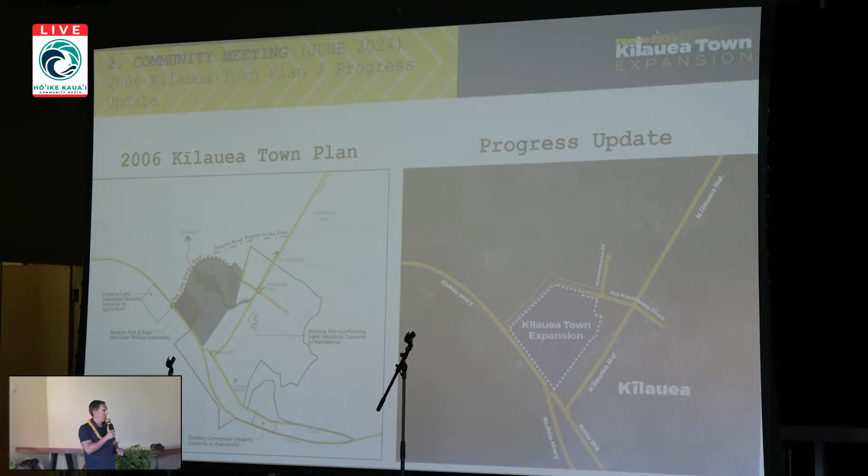So in 2006, there was a Kilauea Town Plan. I think this is where Adam was alluding to the comment, is this ever going to really happen? Well, yes, it is going to happen. Last year, the county secured the parcel which is dedicated to this expansion project, and it is moving forward, particularly hinging on that Namahana Parkway design and construction. Next slide.

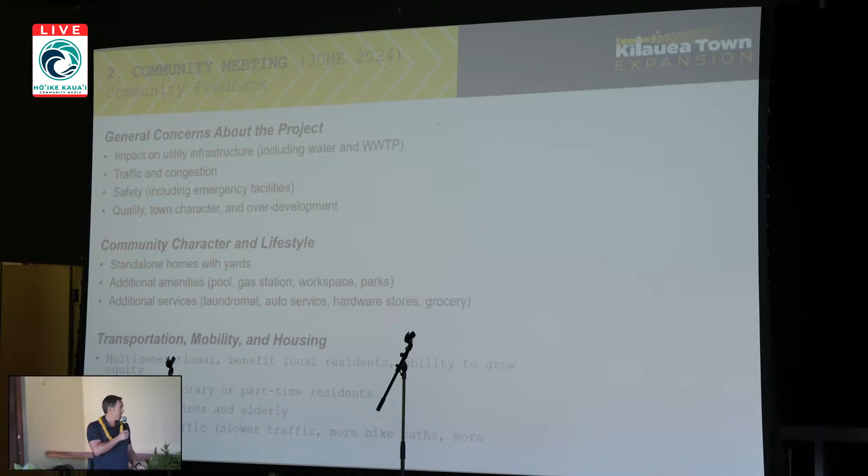So during the meetings, we always want to get some sort of feedback. Meeting number 1 was getting a lot of feedback—what you guys wanted, what your vision was—so we could start developing concept plans for this. Some of the notes that came out of those comments are as follows: general concerns, obviously infrastructure, water, wastewater, traffic, safety, and the character of the community. You guys don't want the community to be altered, so whatever's built has to somewhat fit with what's existing. And the last one, transportation and mobility—multi-generational, how to get around without driving. Can you walk? Can you bike? Improve traffic, slow driving down to allow for better pedestrian and multi-use access. Next slide.

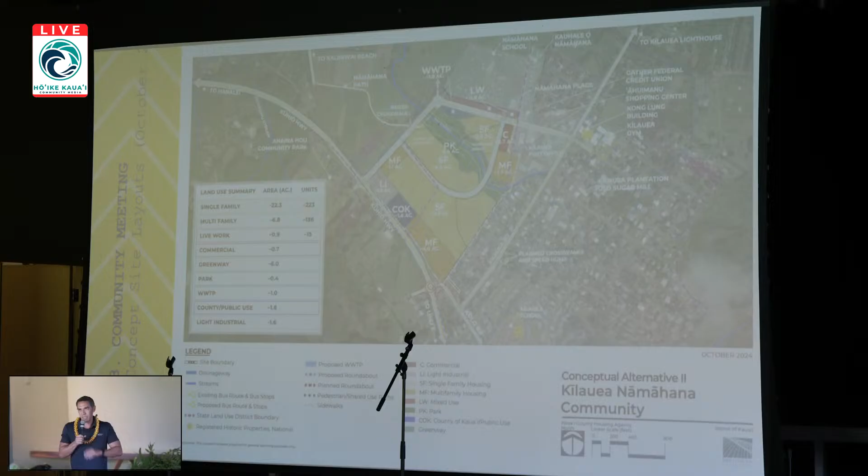There was a lot of feedback on these plans. Particularly, no one really liked commercial or light industry along the highway. They wanted it more focused towards the central core. That was worked out. The treatment plant—again, the concern was proximity to the school, proximity to residents of the multifamily, and wind direction. So that was worked out.

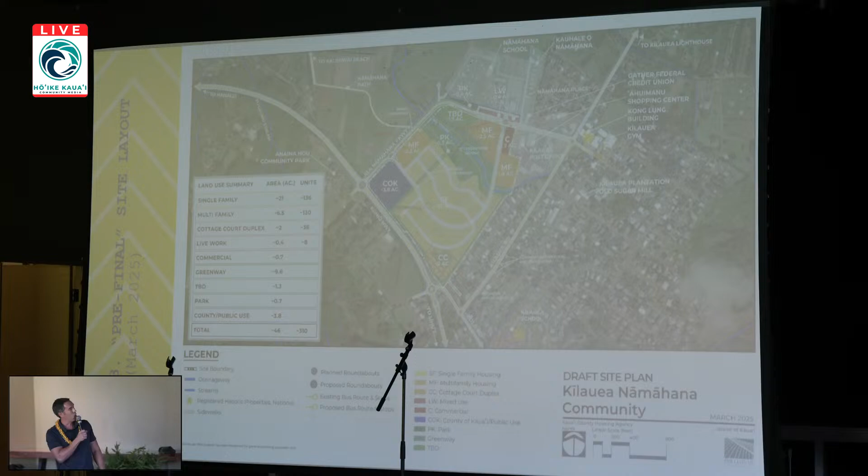The wastewater treatment plant is no longer at the top by the school. In fact, there's a green space labeled TBD, to be determined—that site is still to be determined. The commercial area is centralized to match the rest of the commercial area within town. The County of Kaua'i has that corner parcel along the highway near the roundabout, so there are plans for that which will be presented. Last meeting, in March, the county was saying it could potentially be the site of the wastewater treatment plant, and if space allowed, a potential fire station. We'll present on that a little bit later.

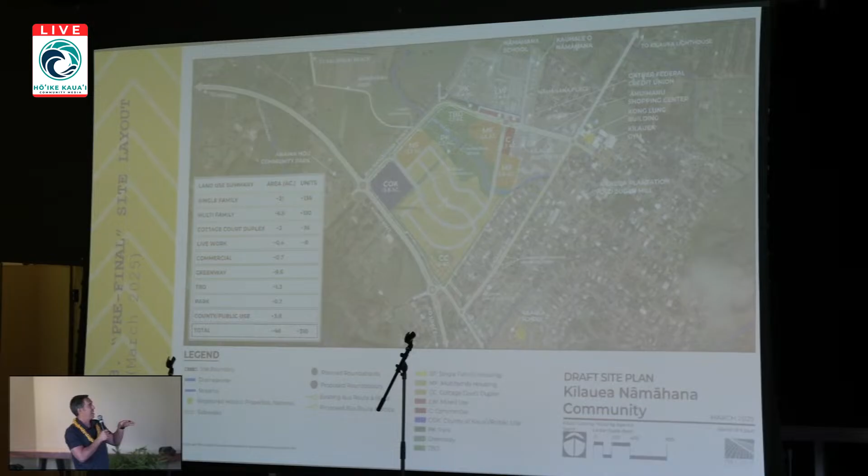So this was from March, and again not too much has changed. We just want to bring us up to speed a little bit as to what was discussed to get feedback from you guys and what it came out to be.

There was a need, a demand for bus stops. So these were bus stops we are hoping to integrate. We'll show those exact spots, which are still options—they're being discussed with DOT and the county to see how it will all work out. But bus stops were something that were included, and it's more fixed on our current plan.

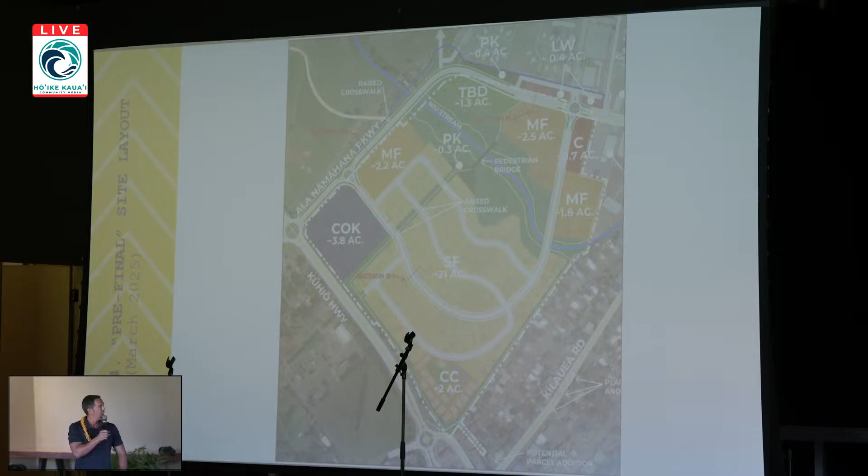So we looked at some roadway sections for comments and feedback to see what the community thought. N1 is that one along Ala Nāmahana. We were looking at grass swales—you can see there's sidewalk, grass swale, bike lanes, then the driving traffic.

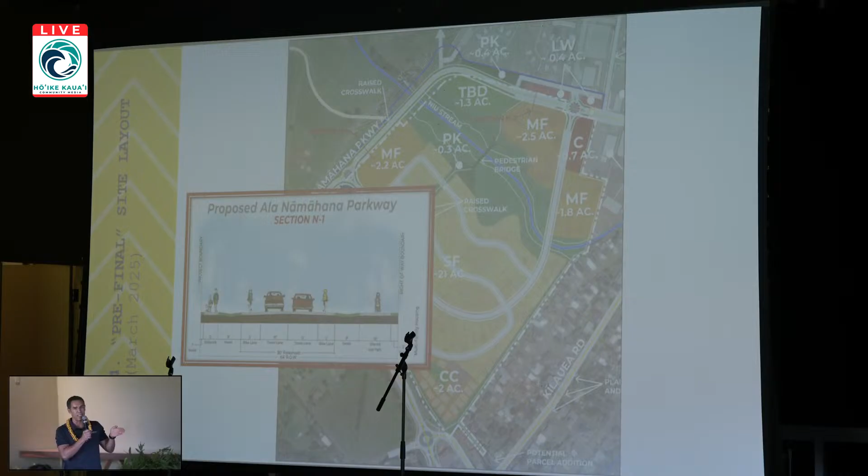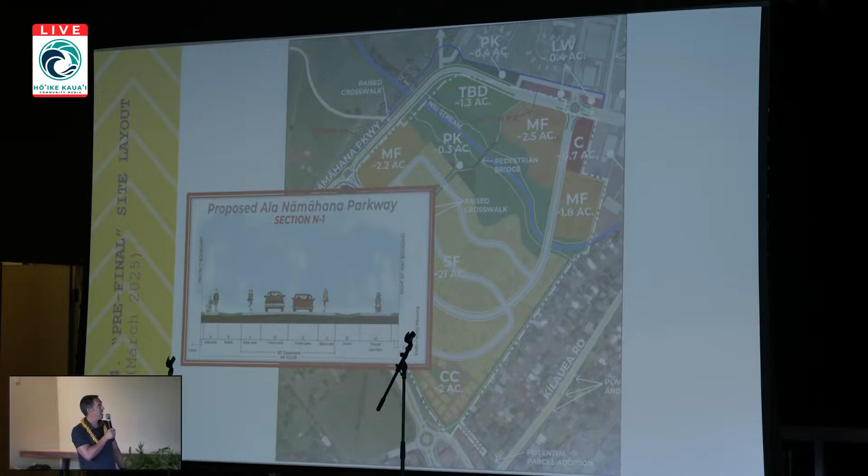So this is a proposed option with grass swales. There was another option where you have curb and gutter, more toward central town, traditional curb and gutter for parking. It still has the bike path, so you don't lose that—it's still there. Driving traffic is still also able to go, with sidewalks.

So we wanted feedback to see what you guys thought of that. Did you want grass swale? Did you want more curb and gutter? Parking or no parking? That was feedback I received from the last meeting.

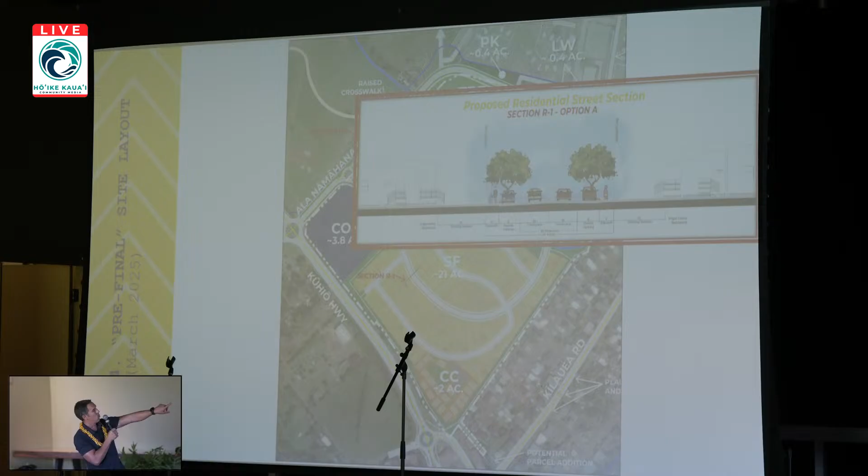This is a look at the residential section, inside the yellow where the single family housing is. There were two options proposed: Option A, traditional curb and gutter with parking, and one with the grass swale.

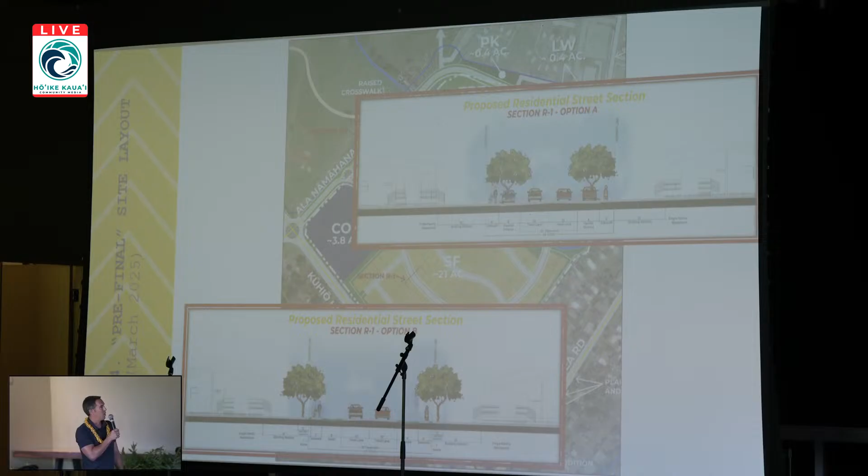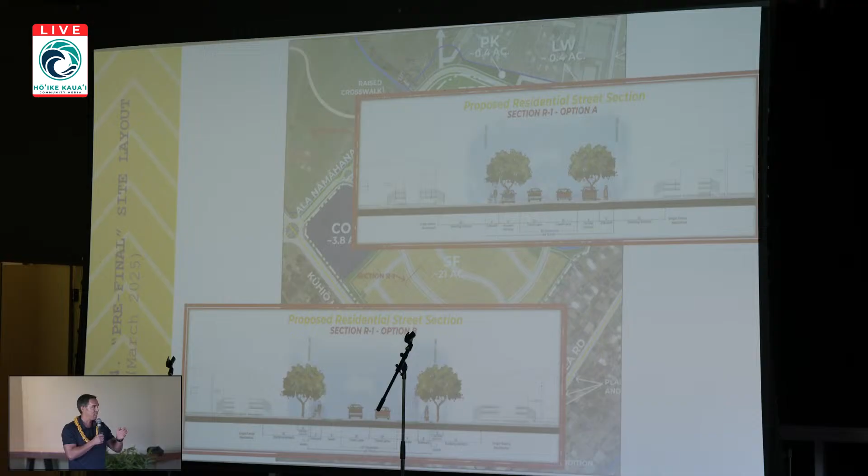This is more similar to what is currently in Kilauea Town with the grass swales. So you see the two options—you have parking in the upper right option with the curb and gutter, and no parking in the grass swale option. You sort of lose that parking, but you get the grass swale which matches what's currently in town. The feedback on this was mixed—half the people wanted grass swales, half wanted curb and gutter. There was a lot of back and forth as to why, and we'll present what came out of that a little bit later on.

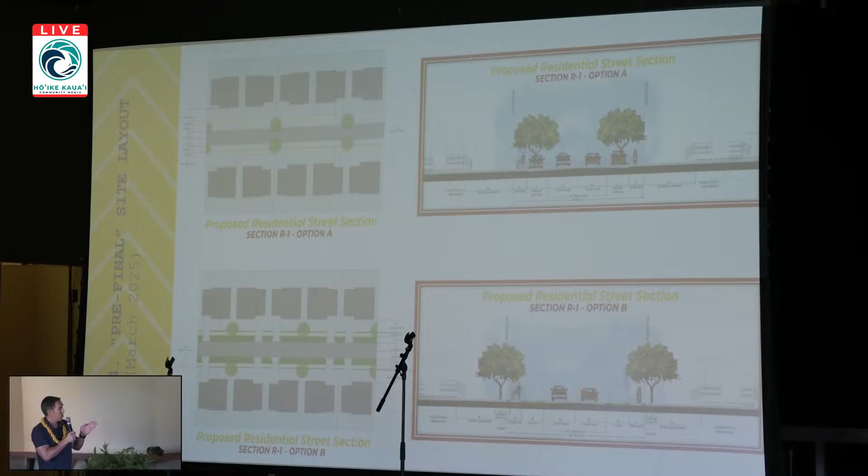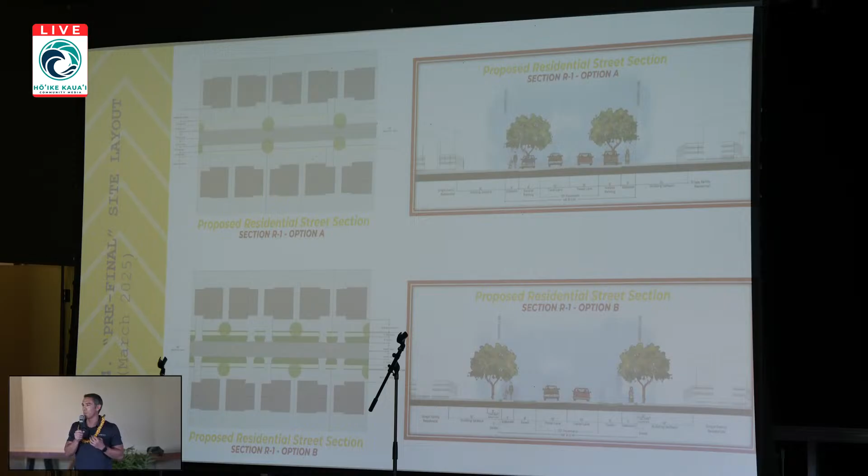So this is just another look at it, just so you can see a little more visually. Again, the top one is the curb and gutter, allowing for cars to be parked in the residential areas along the side, versus the lower option with the grass swales where there is no parking. Some of the concerns the county design team had was if you have the grass swale option, a lot of people have extra cars and they're likely to use that area for parking anyway, which sort of rules out the real purpose of the grass swale. When it rains, it gets muddy, they're all messed up. So there's been a lot of back and forth, it's very controversial with mixed opinions on what the community wanted for these areas.

Next slide. Okay, so that was a very quick synopsis of the past three meetings. There were three different times we received feedback, asked questions, and you gave us your comments, which we're always open to. There'll be a slide towards the end where if you're not on our mailing list, you can sign up to email or contact us directly. There's a county site where you can see all of this past stuff, the design files, presentations, and recordings of the presentations. Sometimes we even post the questions and feedback summaries so you can read through what people asked or responded.

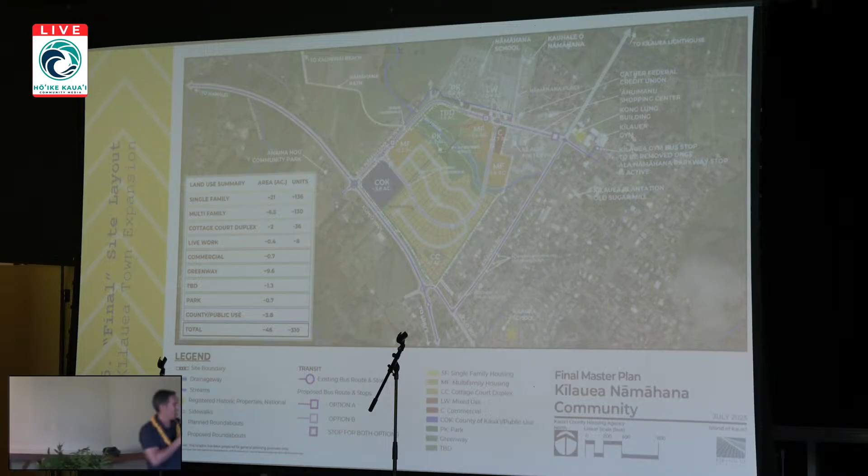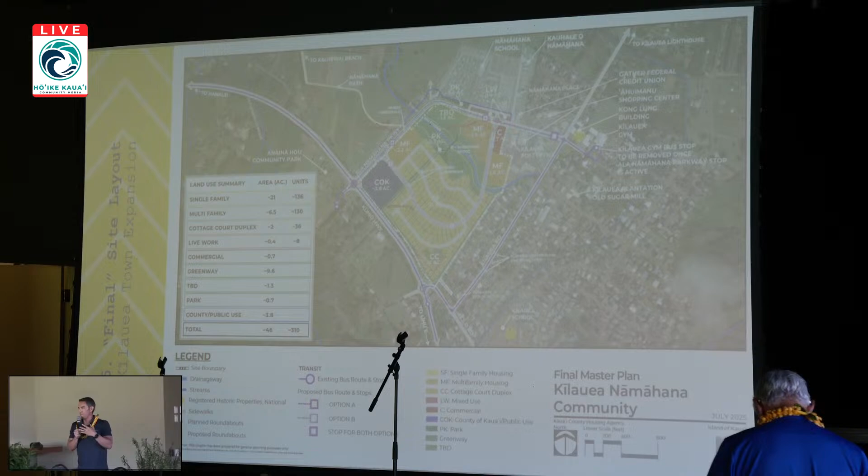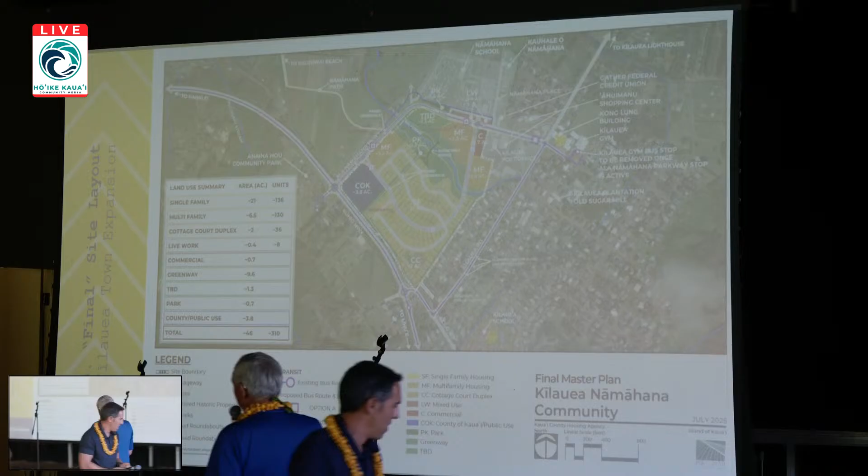So I'm going to turn it over to Bill from Bound Engineering to go over the technical side of the current master plan. You'll notice it says final master plan — it's final in the sense that we need to draw a line in the sand so we can complete the rest of the studies: environmental assessment, rezoning. Can we count all those areas and units to stay exactly as they are? Probably not, it's going to shift a little bit, but this is the working model that's going to take us through environmental assessments and all the zoning. Thank you, Will. By the way, Will is my son, so I'm Bill and he's Will, don't confuse us. I'm the engineer, he's the environmentalist.

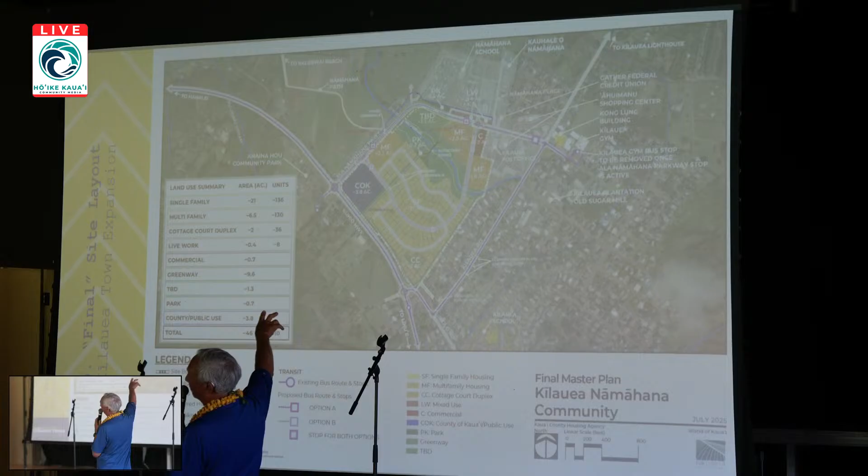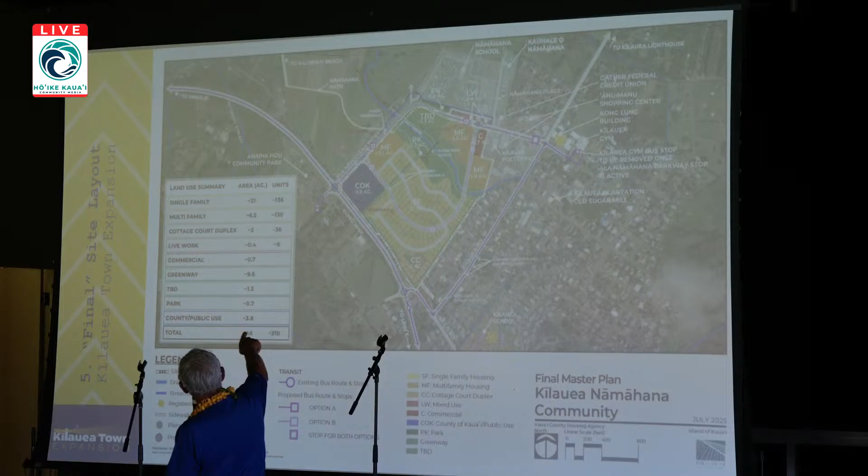So this is the final plan here. Going through some of it — if you look along Ala Namahana Parkway, you see a box marked A, those are bus stops. These are what's being proposed by the bus, maybe the Kaua'i bus. These small blocks are what's being proposed as future bus stops, so it's still in discussion as far as that goes.

To recap, we have some roundabouts. You see roundabouts by the school entrance and the spine road, the interior road that comes through and ties into the other side of Ala Namahana, the Kuhio Highway. So there are two roundabouts there and a third roundabout at the intersection of Kuhio Highway and Ala Namahana. And those are the counts.

Someone asked me, well, how many single family are there? If you look at the table, those are the number of single family units, approximately 136, multifamily 130 — it's almost a 50-50 split. Cottage court is the CC you see on the lower right-hand corner of the parcel, and then the live-work units. So a total of 310 units.

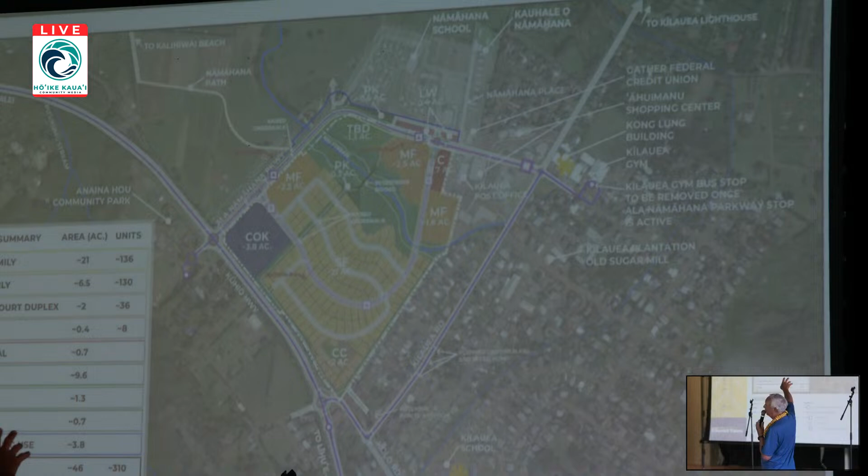You see there's a drainage area, that green belt area is the stream running through. We're keeping it natural. We're working with Public Works right now. You've seen other developments address drainage, and many developments have detention basins — you know what that is, right? It's a big hole in the ground that's grass and it catches the overflow water and filters it out.

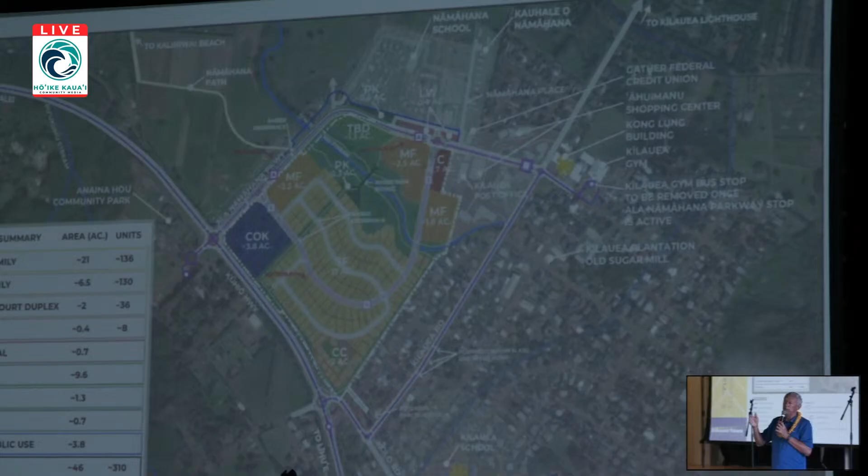That's the typical option. We're looking at an atypical option in that we're thinking of using the stream basin as a detention basin and hydraulically designing the culverts such that it retains the water but still allows a 100-year storm through without damaging the property. That way you remove some of the — I won't call them ugly, but your typical — 6-foot deep fenced-in detention basin.

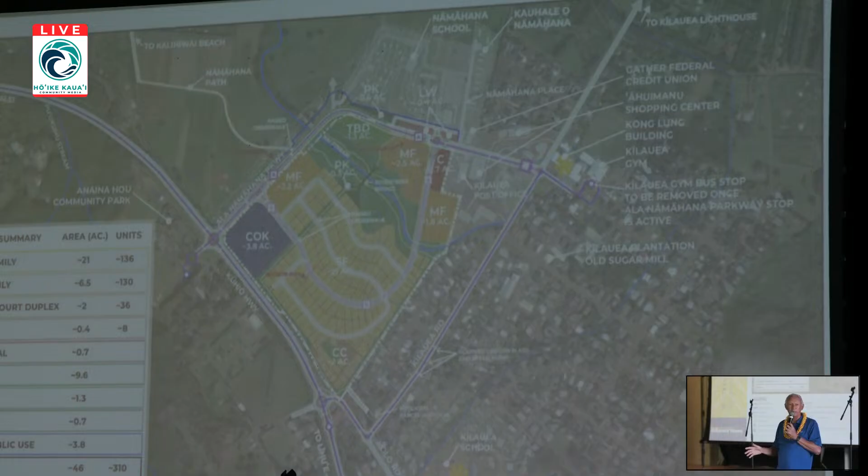So how many would like to see a more natural detention basin versus the standard one you see around? Show of hands. So more natural, right? If we kept this green belt area natural, how many of you would go down there for picnics with family, or for walking trails? How many would use the green belt? So it looks like folks are in favor of having more greenery and open space. Okay, how many have been down there recently?

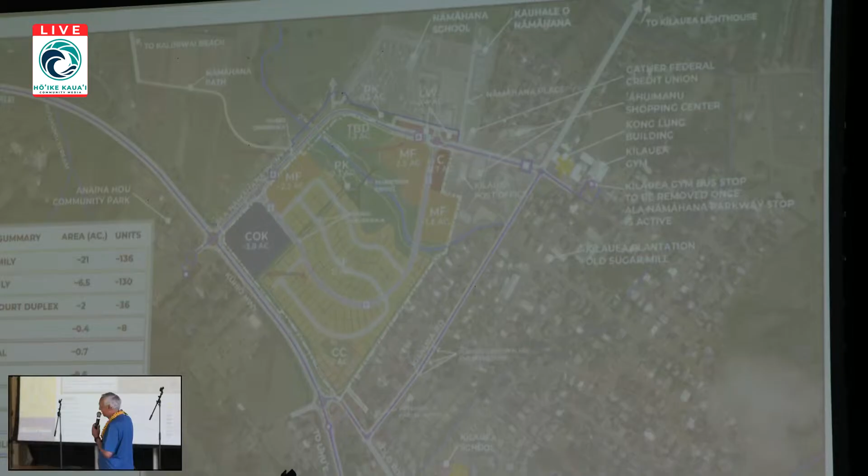Within the last month or two, it's gotten pretty overgrown. Don't you think? Kind of hard to walk through there. So some work needs to be done to improve it and maintain it, and that's for the future. But I just want to get some ideas from you.

Any questions? Let me go through it and we'll open up the questions. Next slide, please. Bill, could I highlight one thing on the last one? Sure, can you go back?

Bill mentioned this, but just to clarify: in discussions with the Department of Transportation, they've recommended two different possible bus routes. Option A follows Namahana Parkway, represented by those bus stops. Option B would go through the internal part of town along that curving loop road. From the Department of Transportation's perspective, it's one or the other, not both. So we very much want your feedback on the community's preference for the bus route and the future stops. I didn't want to gloss over that, because we really do want everybody to comment on their preference.

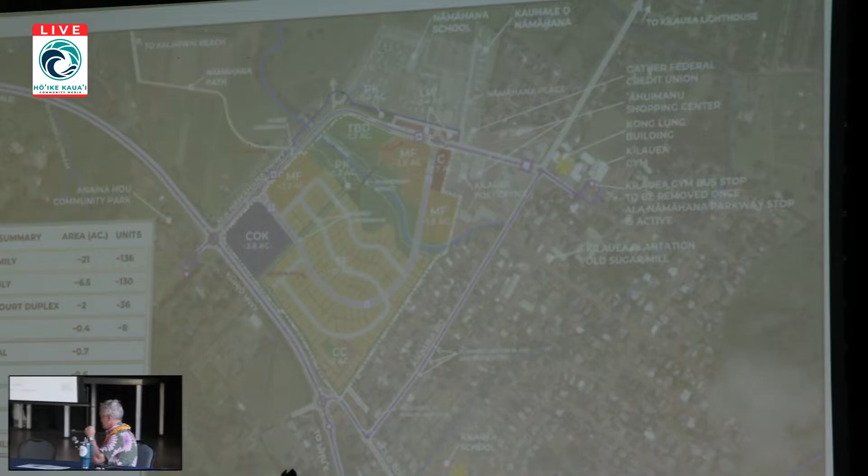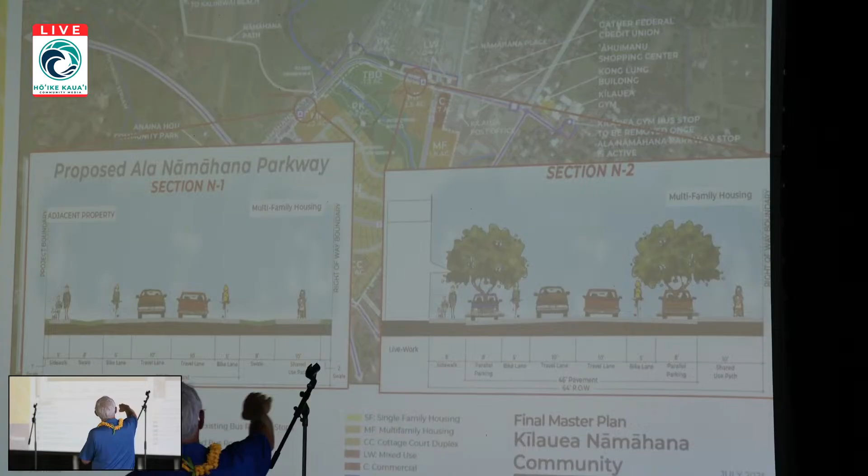Thank you, Adam. Can you go to the next slide? So this is what we finally came up with. For Namahana Parkway on the left, we're going to have a combination of grass areas—it's hard to see on the slide here—and on the right we have curb and gutter.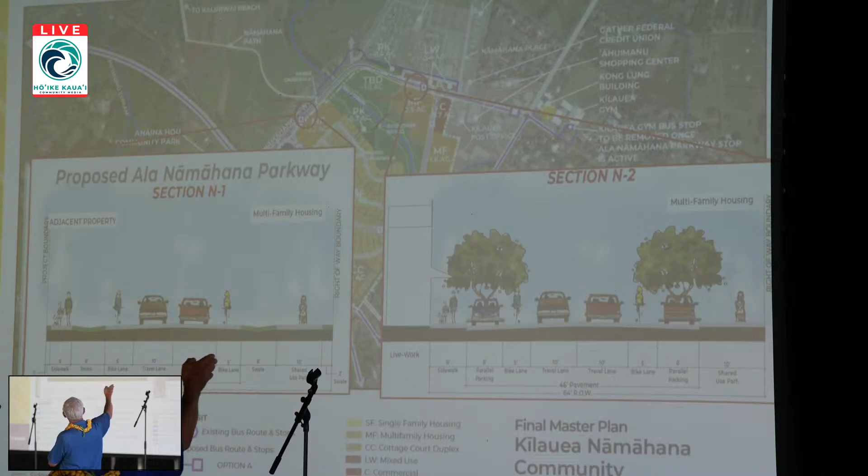Essentially, curb and gutter will come from the commercial area where the post office is, and we'll extend it through the live-work area. Makes sense, right, for this commercial section?

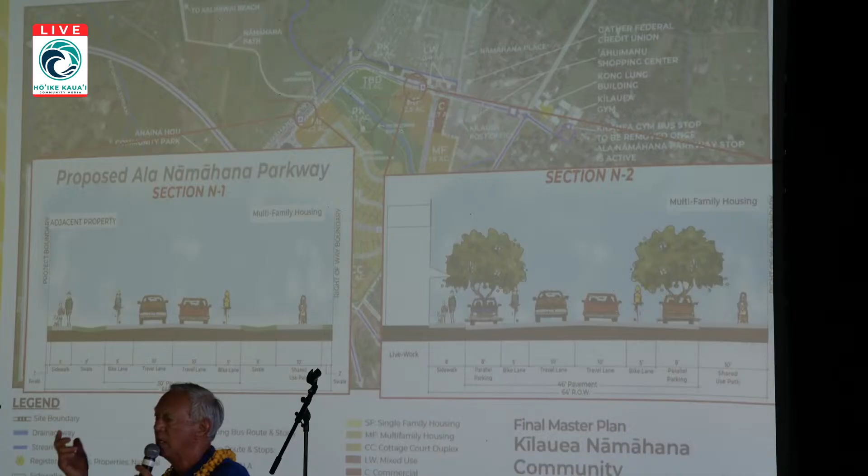From there—sorry, we don't have a pointer—there's a green edging by the 0.7-acre park area, so that will be a grass strip. We tried to incorporate a rural look to it, so in the middle portion it'll be grass swales.

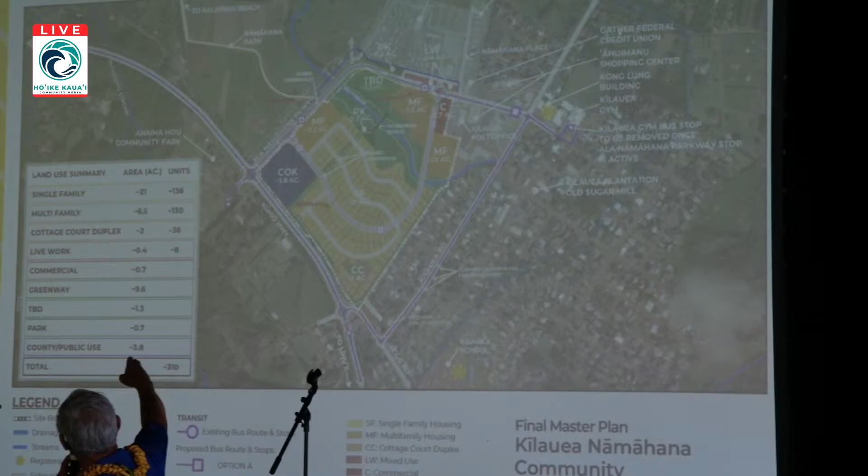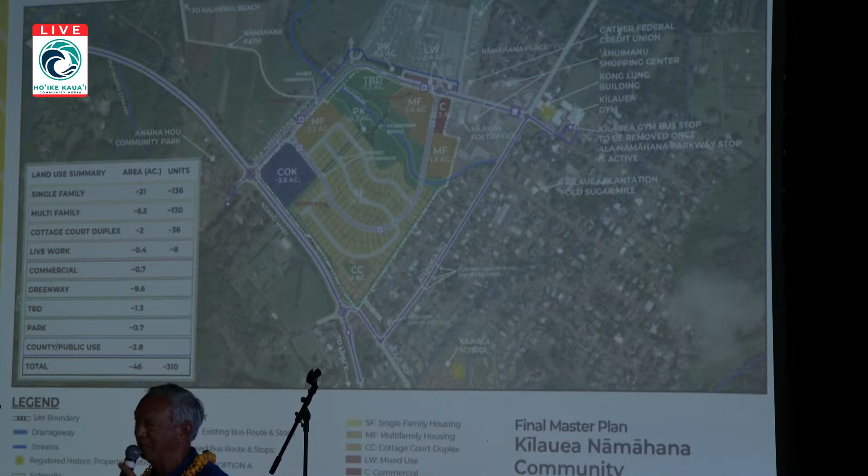As you come back toward the second roundabout, closer to the intersection, we again transition from swales to curb and gutter, which will interface with the larger roundabout at Kuhio Highway. That kind of makes sense, right? We're incorporating a little bit of urban character where there's a need for it. For roundabouts you do need curbs, because you don't want people jumping the curb and going around illegally. So that's the general plan for that.

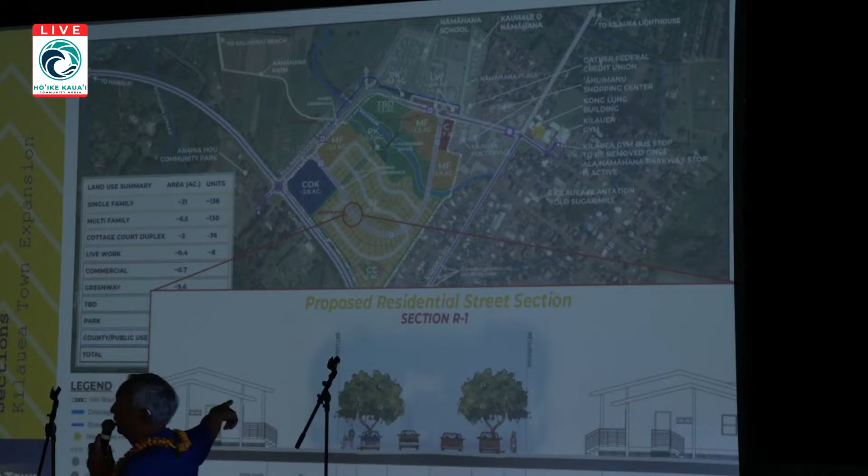Let's move forward. Next slide. For the internal roads, what we've heard and what we're recommending is that the spine road—the one circled there—will have curb and gutter. This is the section we're going to use for the interior roads.

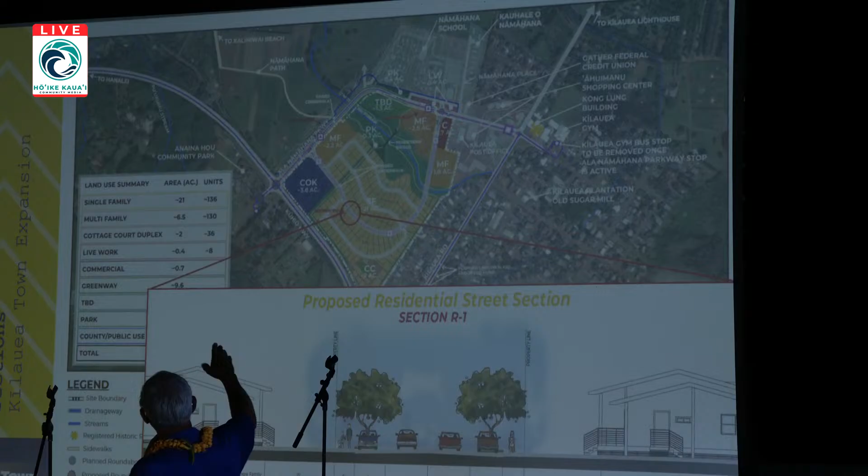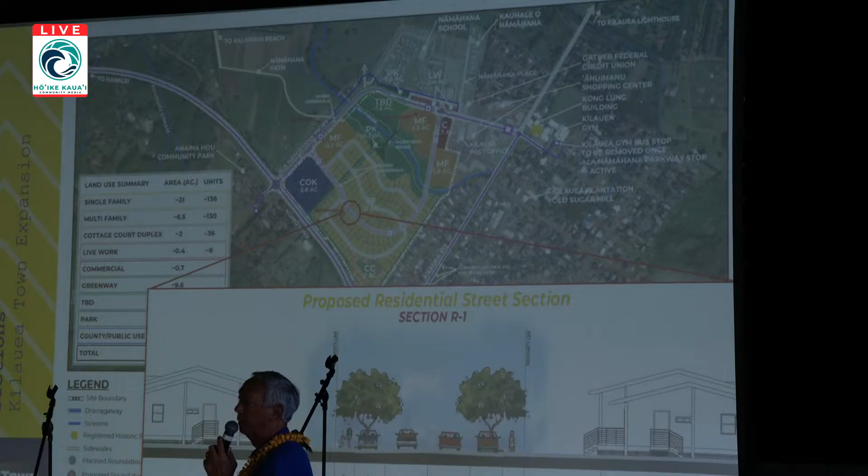The jury's still out on that; you could have grass swales to keep it more rural, or you could go with this configuration. I'm thinking you probably want more of a rural look on the interior, but at this point the main spine road that bisects the site will be this configuration with parking allowed—so no grass swales in this area, but the interior will have them. Moving on to the next slide.

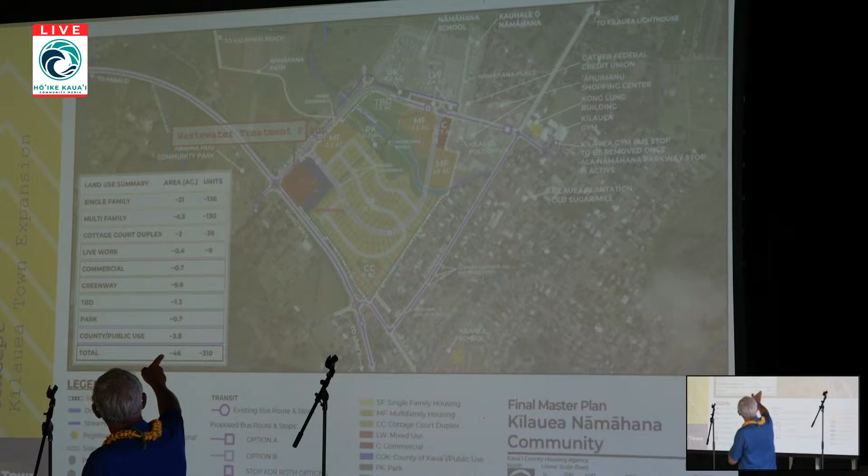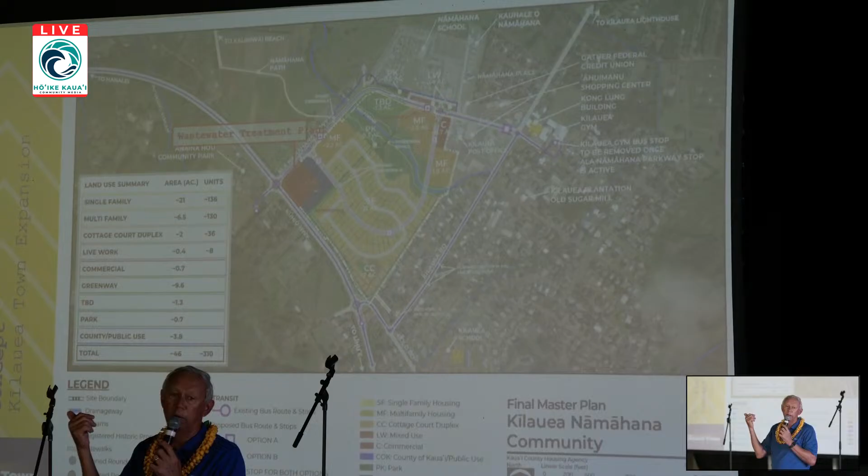This slide shows the county site—the 3.8 acres. The wastewater treatment plant will take up that corner, about 2.3 acres. You can see the blue area around it is a buffer. That blue area just to the right, next to the treatment plant and the subdivision, is wide enough—about 150 feet or so—for a possible fire station. I'm working on the fire station right now on the civil side; that site is large enough. There's also a buffer around the single-family area, so I just wanted to point that out to you.

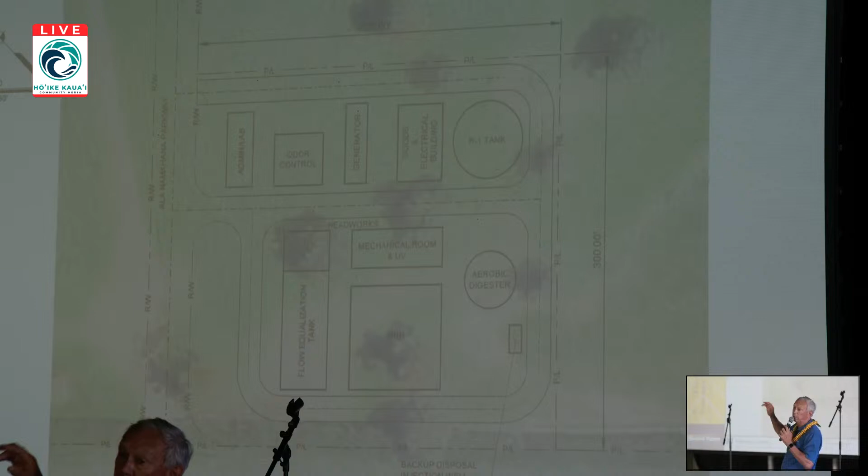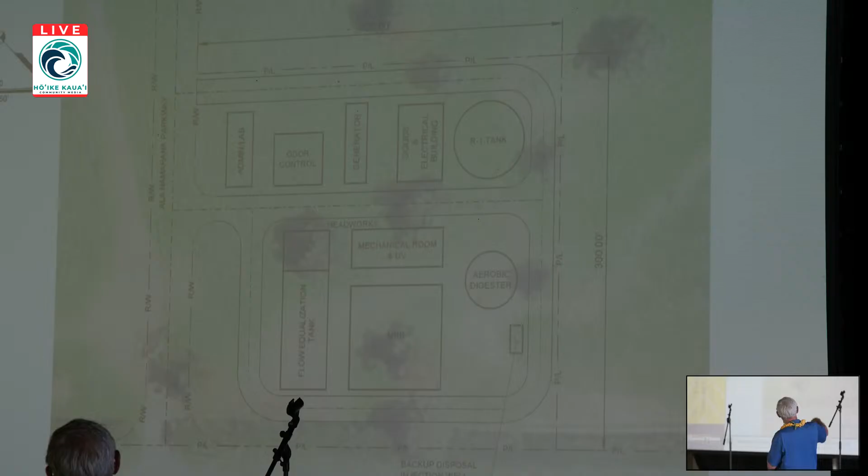Next slide, please. I don't know how many of you can read plans, but this is the box diagram of what the treatment plant will be. It'll be built modularly, because obviously you're not going to have 300 homes coming online all at once, so it has to be built incrementally. I won't go over all the details, but you have equalization tanks, various reactors, UV treatment, aerobic digesters, and so forth. So this is the site for the treatment plant. Next slide, please.

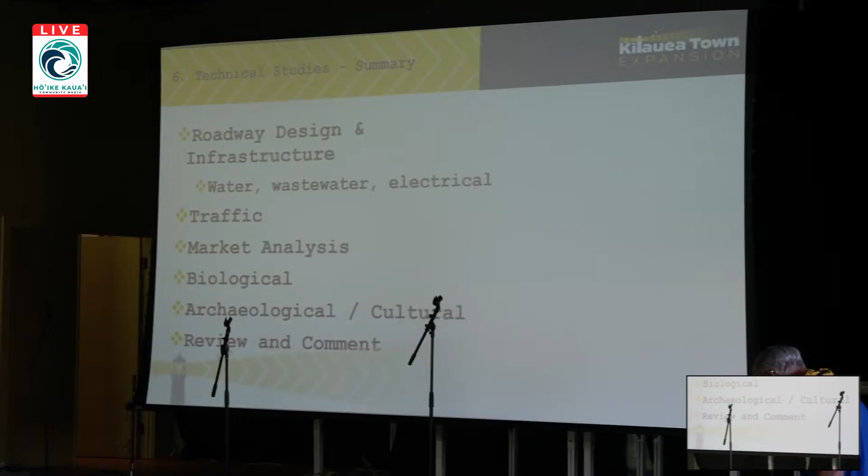Okay, so we will have some time for questions. But regarding technical studies, remember we said we're trying to lock in something so we can just finish up the technical studies, allowing us to do the rest of the analysis on the site.

So roadway design and infrastructure, Namahana Parkway is the priority that has to be built and constructed first. Utilities have to be run in that corridor in order for everything to work. So that is the priority.

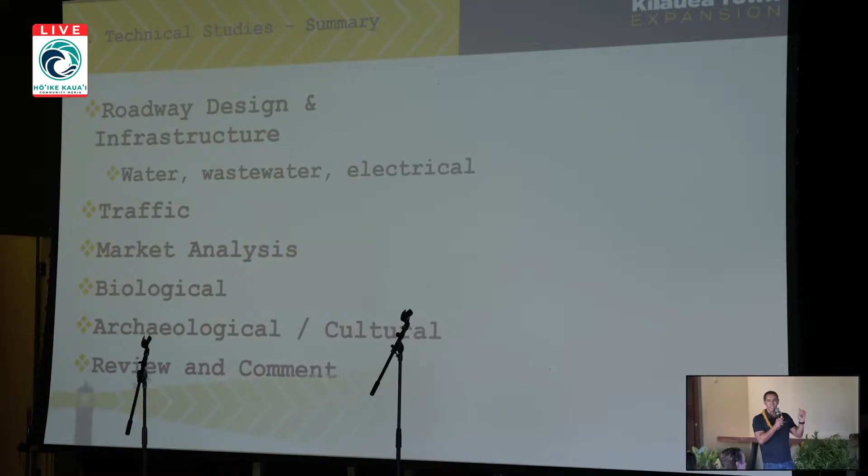Traffic studies, market analysis, the biological, archaeological, cultural studies are, I would say, greater than 90% complete, based on the plans and modifications that have come out. So some of the results of the traffic and market study have been used to determine what the density might be, where the roundabouts would be, and that it's going to work.

Even though a lot of various comments came in and matched those analyses, that's good, because it confirms what the analysis showed. Those are background studies to confirm and justify why things are going to be the way they are, and we're reviewing and commenting on the finals of these as they come through.

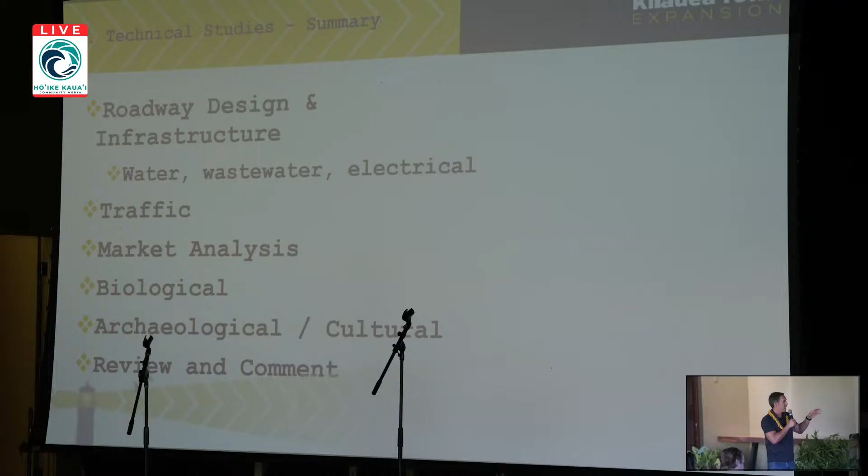So what's left is a preliminary engineering report. That's the real technical studies: traffic, housing analysis, drinking water, wastewater. The environmental assessment we're hoping to have drafts done before the end of the year. That's our goal.

There's a NEPA component due to the federal funds that are coming through, so there will be archaeological, cultural resources, and biological and ecological effects analyzed. Then the zoning and permits to allow for the construction to actually carry through.

If you already are on our contact list, there's no need to put your email down again, you're already on the list. I think we have over 250 people on that list already. But please sign in, and you can always email us.

If you have questions you think of after the fact, even after typical comment periods, we still get emails asking about things or commenting, and we read it, respond accordingly, and incorporate it in. So that's always open.

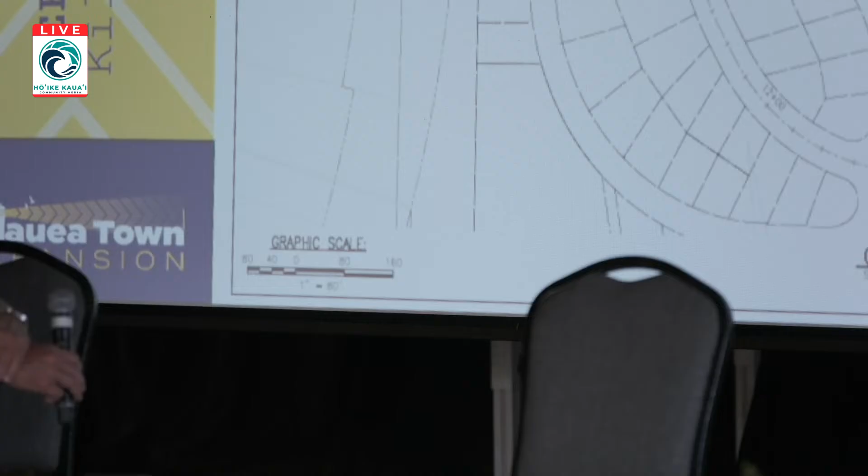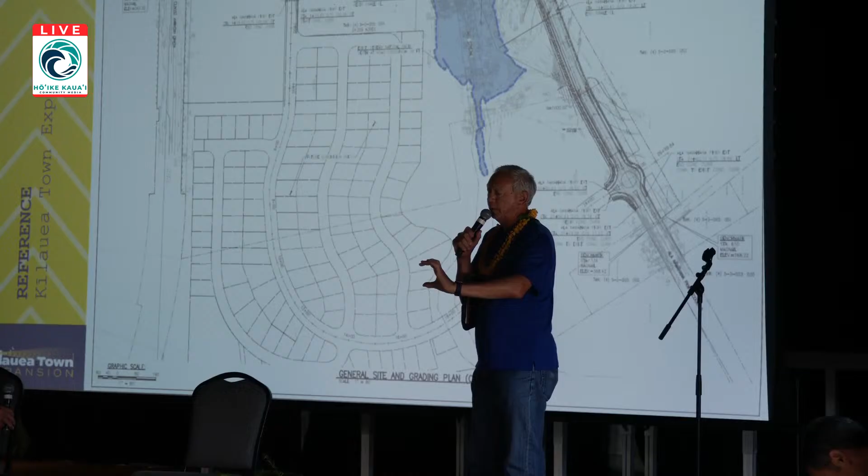This is basically a natural detention basin. I'll try to bring it down to layman's terms, but the roadway is designed for a 100-year storm. So this is the ponding area for a 100-year storm, which will eventually go under. You see the triple culverts there? It's a triple barrel culvert with a smaller culvert on the lower level that will always allow water through. But we have to control the water, we don't want a big gush. So basically, this design will retain some of the water, then it'll eventually go through.

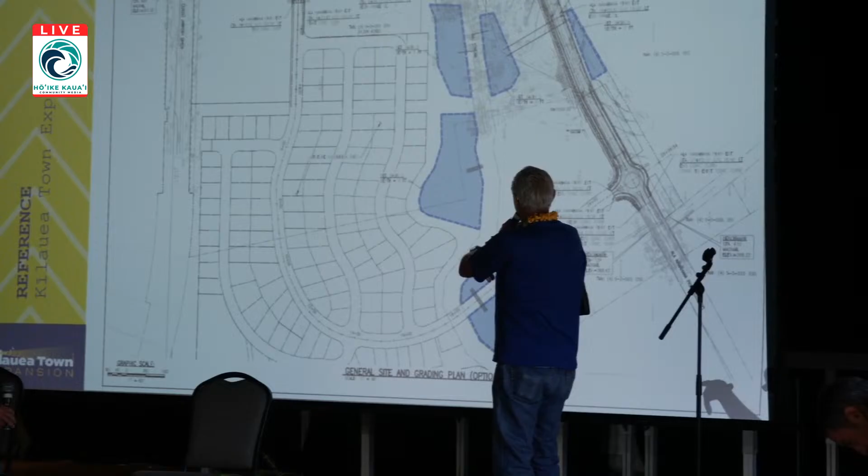If you go to the next slide. So this is your standard detention basin that you see all over. This is the approximate size of the detention basin that would have to bring the runoff into the stream to pre-development levels. So you may have heard that, right? We're not allowed to increase the runoff into the stream, so we have to store it or retain it and then allow it through. So when I mentioned this to you verbally, that's what we were talking about.

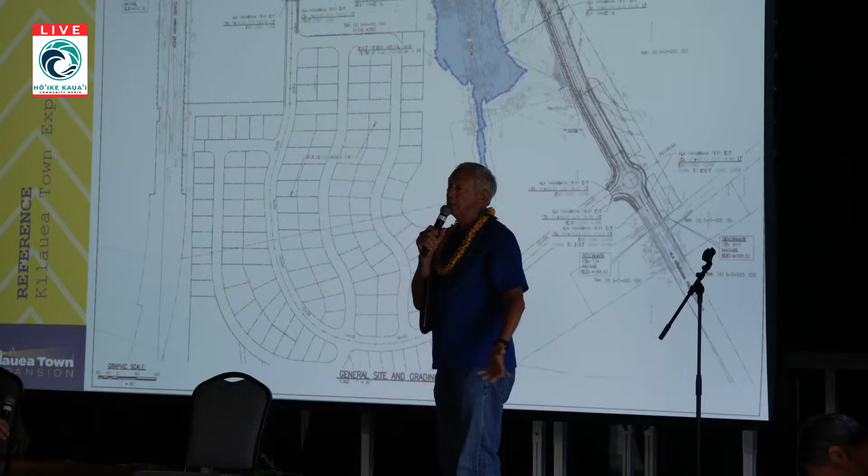So I prefer the other scheme, the initial one, go back one. This has less impact, right? But it's out of the box type of thinking. There are no regulations for this currently, so we're working very closely with Public Works to ensure the safety of the people and the environmental protection. So that's it.

Okay, so we have these, and I want to make a quick comment about this. So the stream, as it currently flows, ends up at the west end of Kahili Beach. It's the small stream that flows across the sand where the current public access to the beach is. If you walk down that beach, you cross that little rivulet that goes out in the sand. That's the tail end of the stream flowing out on the beach. The stormwater from Kilauea Town currently, along Kilauea Road near the North Shore Clinic, all flows into a storm drain and dumps into the stream, currently ending up down on the beach.

The system that Bill is talking about, to create that kind of natural detention basin, will catch both future and current stormwater from Kilauea so that it settles to some extent and pollutants flush out of the water a little before it goes down the stream and ends up at Kahili Beach. So our hope is that whether we are forced to do these chain link fence surrounded detention basins, or we are allowed to do a more natural detention basin in the valley, either way it would be better than the current system where stormwater simply runs down the stream to Kahili Beach.

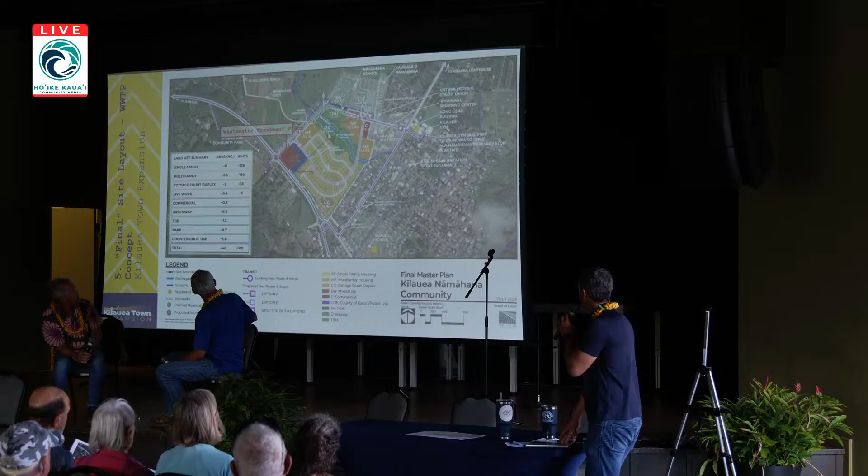So the question was, industrial seems to have been removed completely. And with regards to commercial and light or the live-work businesses, how do we deal with noise and light pollution? Can you explain why industrial has been removed?

So the 2006 town plan called for both more commercial and light industrial space in this expansion area. In our first community meetings, there was a decided lack of enthusiasm, from the comments received, for light industrial space adjacent to this new residential community. But there was interest in commercial spaces serving the local community. So, light pollution...

As a resident of Kilauea, being able to look up and see the stars is very important to me. Along the streets in the commercial areas, we're required to use very low intensity lights for seabird safety. We'd do that anyway, but we're also required by law under a consent decree covering the entire island of Kaua'i for seabird protection. So there should be very low level street lights, to the extent there are any.

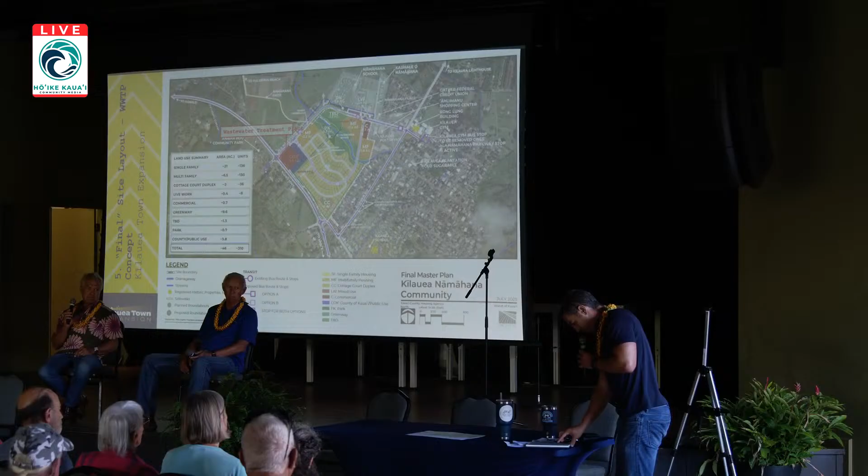Something that I think is absent, and there was some feedback at the last meeting wanting what they call pocket playgrounds, more planned recreational spaces. So this question leads into that - we didn't quite address it head on, but is there a plan for any public recreation? The question was specifically asking about pool, maybe covered courts, restrooms, public pavilion types of things within this community, or is there other things happening?

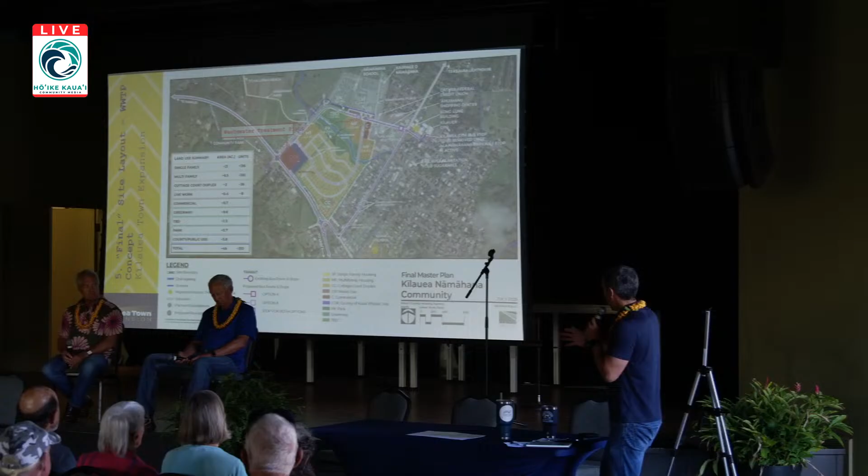Separate from these community meetings, we've also had a separate round of meetings with a community advisory board of about 15 or 20 different folks with long ties to the community and members of the neighborhood association. Taking the comments from the last meeting asking for more of these recreational facilities, we brought that conversation to the community advisory board, and a preference was expressed that the neighborhood association has long wanted the existing Kilauea gym area to be expanded and improved.

So when designing this, there is potential neighboring land that could be acquired for the expansion of the existing recreational center. Rather than develop a whole new recreational center from scratch, we've left that out of this plan in the hope and assumption that we can expand the existing area by the gym and Bushnell ballparks - another thing into the mix of thinking about recreational space.

This isn't going to happen tomorrow, but Namahana School's intention is to have a gym and a swimming pool on their property. Understanding their long-term goals, that swimming pool would serve not just the school but the entire community, so it doesn't make sense for the housing agency to pursue building a swimming pool in this housing area.

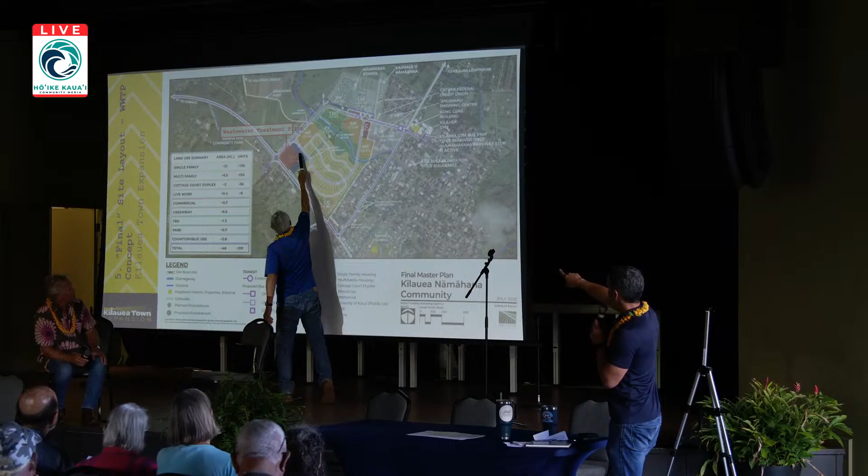Okay, thank you. Looking at the bus stops, there's a question about that. The bus stops labeled A are along Namahana Parkway in the upper part, and the ones labeled B, there's three, run along the interior. So those are options currently in discussion. Is that correct? Correct. Those were the two options that the Kaua'i bus, Kaua'i County Department of Transportation, presented to us to get feedback from the community.

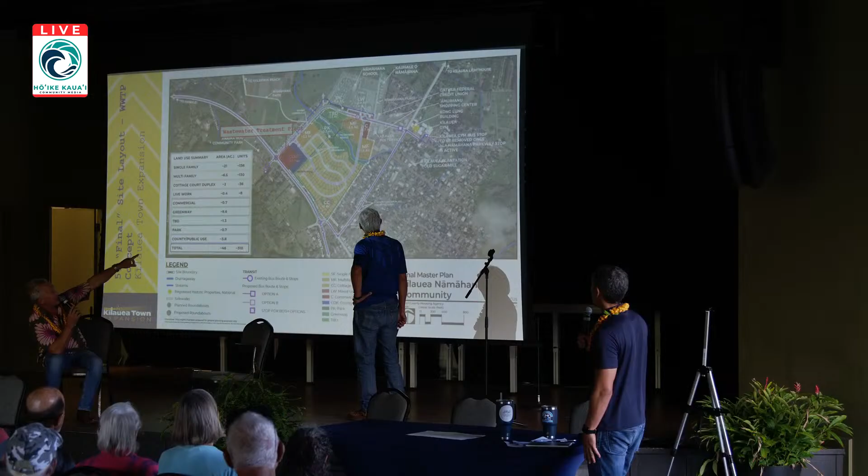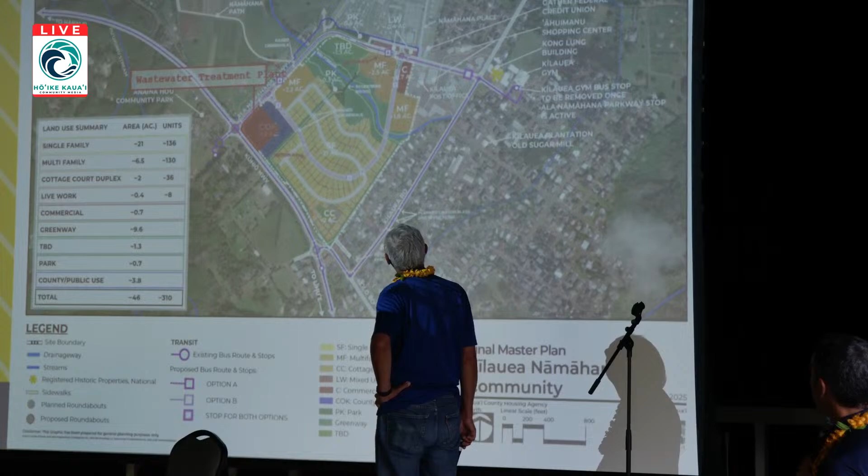In either option A or B, the bright purple square near the intersection of Kilauea and Namahana Parkway, that bus stop, which has already been created, will be activated. Then we have the option of whether the bus travels only down Namahana Parkway, stopping at the two A's, or option B, comes through the neighborhood, stopping at the B's before going back out onto the highway. It seems the B's provide better service to the community since the bus stops are close to where everyone lives. The downside is that if it runs through the neighborhood, we have buses going every half hour through town until 10 o'clock at night. So there was concern expressed about the noise of buses driving through town every half hour, and whether that would be an acceptable trade-off. Take a little more noise in exchange for more convenient bus stops, or push the bus out onto Namahana Parkway where noise would be inconsequential, but you'd have to walk further to the bus stop. That's something we want your feedback on - which option do you prefer?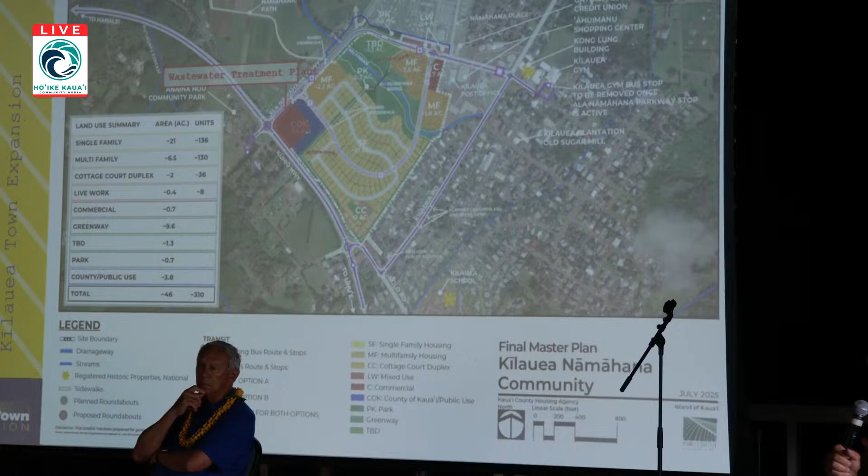Okay, thank you. From my perspective, thinking a little bit ahead, this is the kind of thing we might put out through the county site, through an email blast to registered people, to specifically get feedback on. I think some architectural renderings is something we wanted to bring out a little later on - we're not quite ready yet, but that came up in the questions, what will this look like visually in the homes and structures. So Adam was already thinking about how to get that out to people for feedback. I think the bus routes and the structures might be something we put out a little later on for feedback. So as much as we want everyone to give feedback right now about the bus stops, we do have time, but we will put something out in the next couple months on that.

You should have the surveys on the bus question given to the people who actually ride the bus. I agree. That's always difficult to do with surveys, right, you sort of get everybody. So hopefully the bus riders come out and make their voices heard.

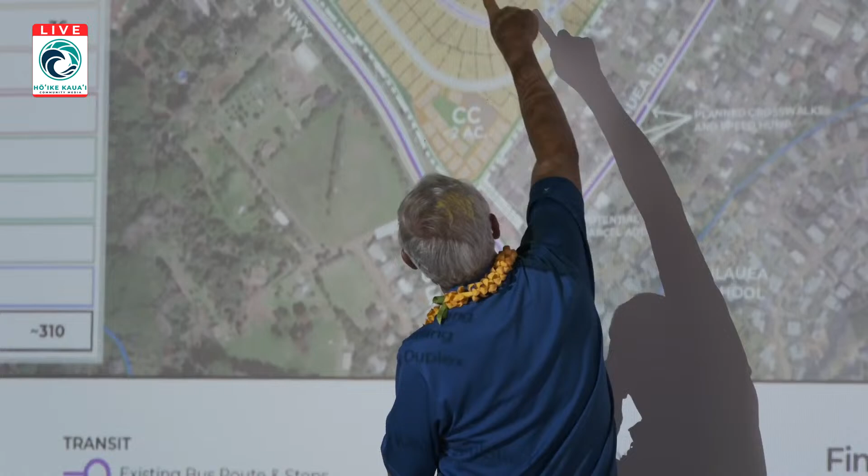While we're talking about transit, there was a question about safety for biking for children within the new development, particularly along the interior to get to school, and where there are swales with just bike lanes. Is that safe, or where is the best route for kids to get where they need to go, or for people just trying to get from point A to point B without a car - if you're on a bike, how are you going to do it? I can take that. What our planners did was create a multi-use path for pedestrians and bikes, in the green belt areas here, there, and along our proposals to have a path across the street.

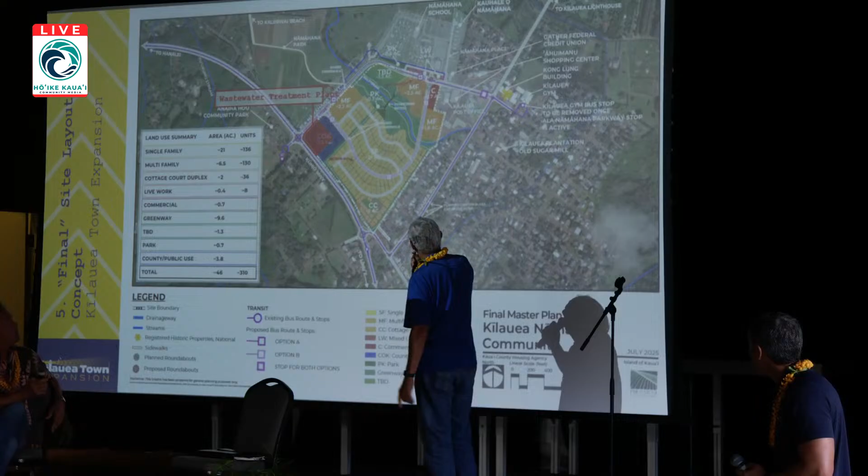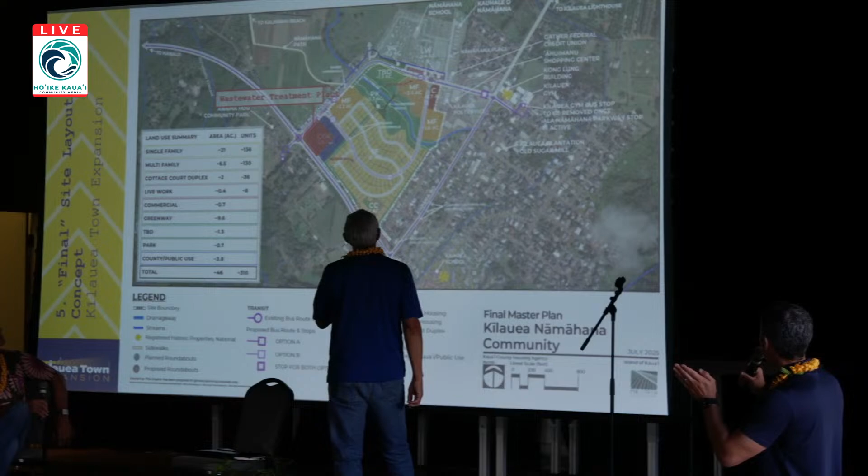There will be bike paths along the roads too. The green belt areas are the pedestrian and bike paths, also along the roadway, so there are multiple ways of getting to and from the schools. Those lighter yellow paths are multi-use paths too, with two alongside the street. For safety, kids on the interior road getting to school and bikers would be most safe on sidewalks, depending on age, while people going more speed, like commuting adults, would use the parkway and bike lanes.

It's just defined walking and biking pathways throughout the entire community. There was a comment and question on why are there so many speed humps, and I think there's a lot of crosswalks, raised crosswalks, so those are essentially speed humps. Design team, what's the reason? Traffic calming.

I don't think the raised crosswalk necessarily designates speed humps, but it's been requested quite a bit through our prior community meetings - speed humps or flattened speed tables to reduce traffic, especially so we don't have people speeding along that curvy loop road through the community or along Namahana Parkway.

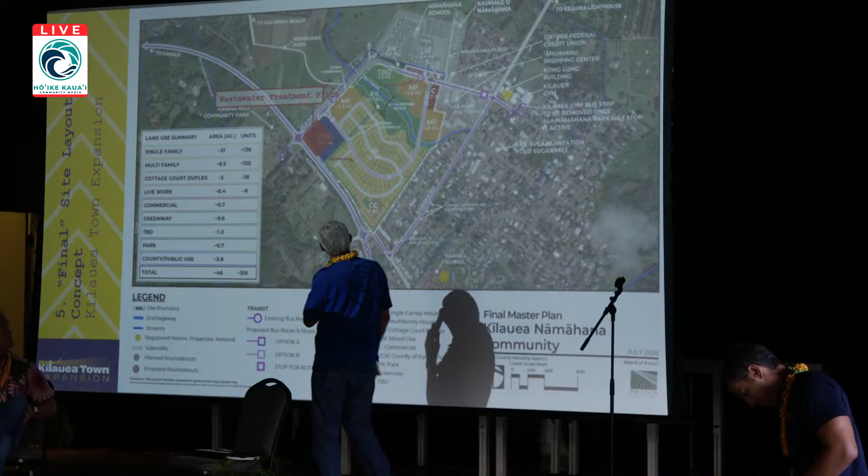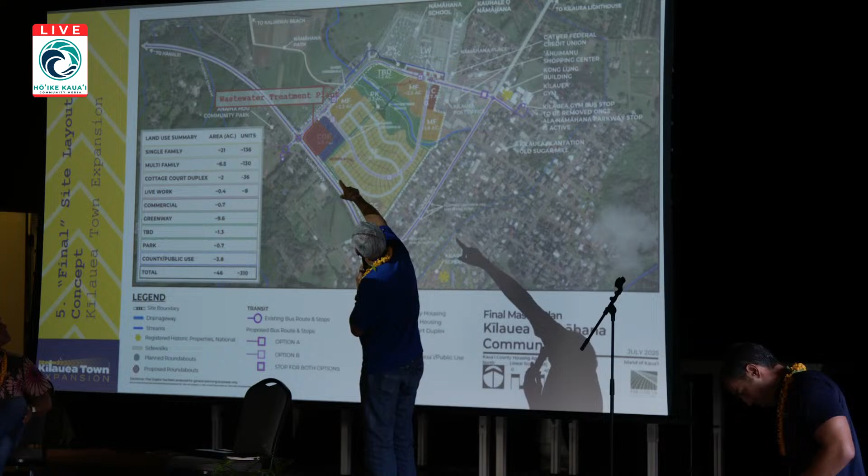What were we originally thinking, Bill, for Namahana Parkway - was it a 30-mile-an-hour speed limit? 25? We do have roundabouts which will control the speed, but of course you can pick up speed again along the curve, then have to slow down at the next roundabout. A good point for a speed table or speed hump might be that crosswalk that leads to the Namahana path to the stream, to bring down the velocity there. It's a thought, and you're welcome to comment on it.

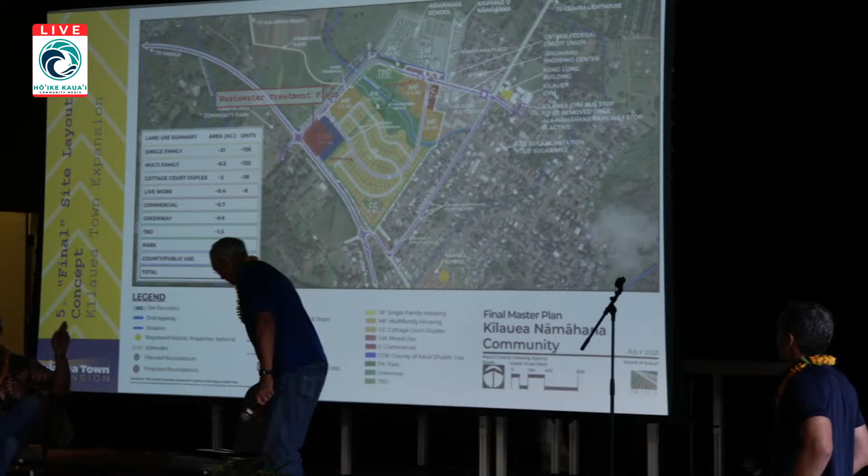That was also a question that came through - it's included in the environmental assessment: biological, archaeological, cultural, all being studied, so it will be a package deal with the project. Thank you for the clarification.

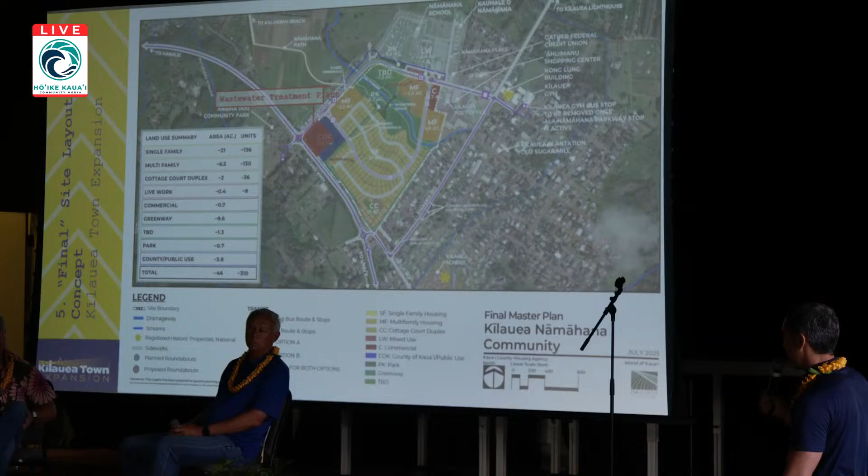Is it too early to give a price point at which some of these lots might be available? It's going to take several years before any homes are built on this property, so I have no idea what building costs will be then, but I can offer what actual homes we're selling now are. We're building 3-bedroom homes in the Lima Ola subdivision, and for that project we represented to the Land Use Commission that all homes in the entire subdivision would be for households earning 120% of area median income and below. It's our intention for this project to allow some homes to be at a little bit higher levels, which is realistic for what the community earns here. The 120% homes currently being sold are 3-bedroom, just under 1,200 square feet.

There are 2 models. The less expensive model is being sold for $480,000, and the slightly more expensive model for $510,000. That's effectively the county's cost of construction, and the county has eaten all of the land costs and infrastructure costs to make the lots possible, which equals about $125,000 a house - so the county is subsidizing every one of those homes to the tune of about $125,000.

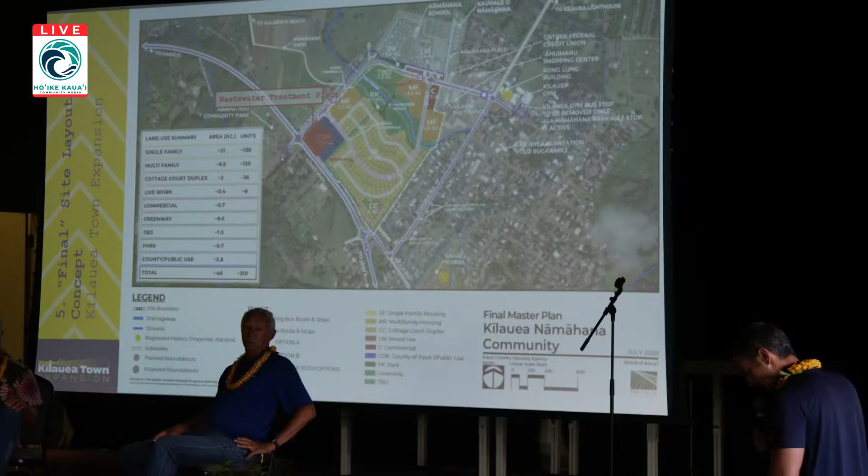We're getting close to 6:35, cutting close to that limit. I think we might end here, but as for the Alanamahana Parkway, that's the first to be installed. Do we have an anticipated start for that one? And what is the potential goal to be completely built out?

As I mentioned in the introduction, that project was placed on the county STIP, the Statewide Transportation Improvement Program, for funding beginning in 2026. The amount of funding the county requested from the federal government starting in 2026 was $17.5 million, which is 80% of the estimated project cost. Our hope is that we begin construction on this in late 2026 or 2027, given the federal funding that should be lined up.

I agree, we're pretty much on track. I think the EA is going to be put out by the end of this year. Our plans for Alanamahana should be in permit by the end of the year or early next year. Given six months for approval, probably third quarter of next year could be groundbreaking for the start of construction. So I think we're pretty much on track with what you're hoping would be the start date.

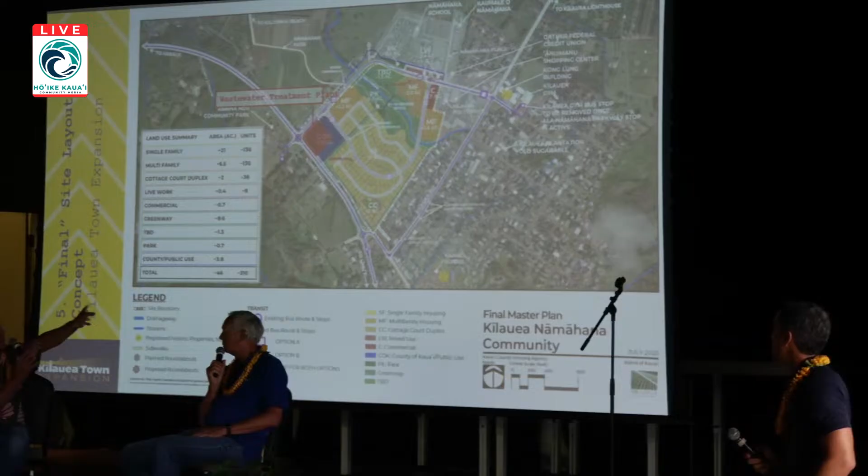And then you bring on different areas of the housing, potentially whatever makes the most sense, whether starting from the town core and moving outwards, or phasing construction of the homes in a logical manner. The intention is that the total number of units will all be built slowly over time. That was one of the things the 2006 town plan called for when it asked for this project to be developed for affordable housing gradually brought to the community over time, as opposed to a massive influx of people all at once. So this should be developed slowly over perhaps a 10-year period in different phases, not all at once.

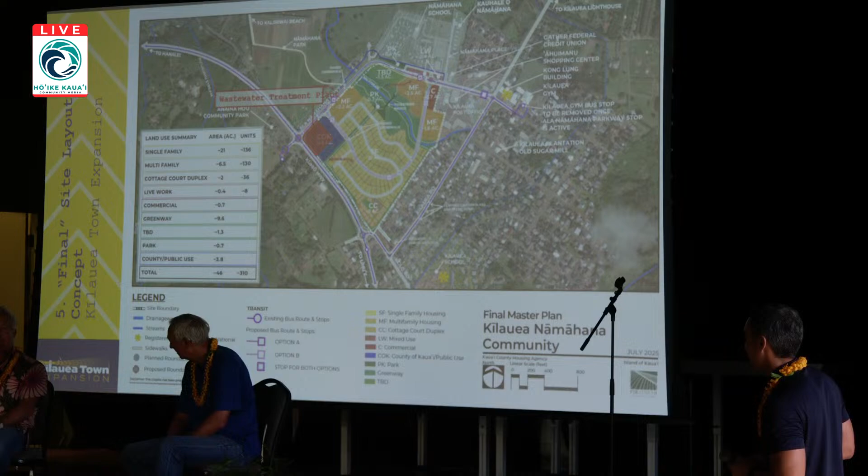So thank you, everybody. Adam, any final words to close out? No, I thank you all for being here. It's been a pleasure to be part of this community process. Unlike some other meetings I've attended, it's always pleasant to come to these meetings and hear productive and enthusiastic comments from people, as opposed to negativity and complaints. So I'm excited about how the community has embraced this project. We hope we can do it justice and put together something that serves the community for the next 100 years.